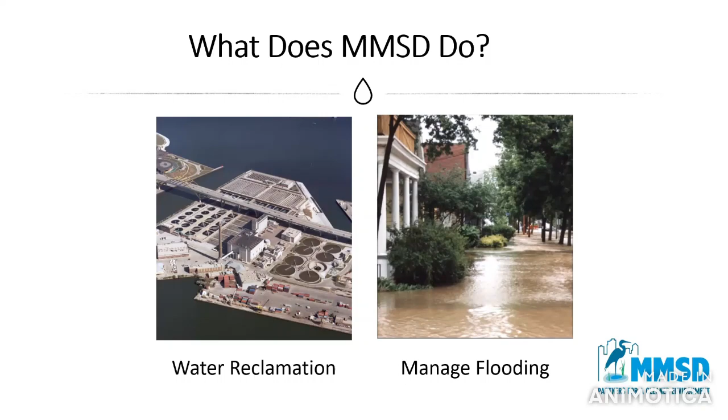Speaking of that and more, one of our greatest success and bragging points is our Milorganite program. Milorganite is a slow release nitrogen fertilizer. If you break down the name, it stands for Milwaukee Organic Nitrogen. It's a Class A biosolid. So what that means is through our Clean Water Act, CFR 40 Part 503, which is the provision for biosolids, we meet a Class A standard, which means it's safe for use in growing produce with the product.

It's a heat dried product that we produce at our Jones Island Water Reclamation Facility, which I'll give you more of an overview of. We produce and sell 50,000 US tons, or 45,000 metric tons annually, and it contributes to helping us offset about $12 million of operational costs on an annual basis.

On the green infrastructure side, I wanted to share this brand, Fresh Coast Guardians. It's our very public-facing, accessible brand for our green infrastructure initiatives and some of our other sustainability initiatives. It's a wonderful group of folks at MMSD housed in our current planning, research, and sustainability division under our sustainability manager, Brianne Pleer. The goal of our Fresh Coast Guardians is to capture 2.8 million cubic meters of water where it falls by 2035 in any rain events, which is equivalent to the first half inch, or over a centimeter, of rainfall on the service area.

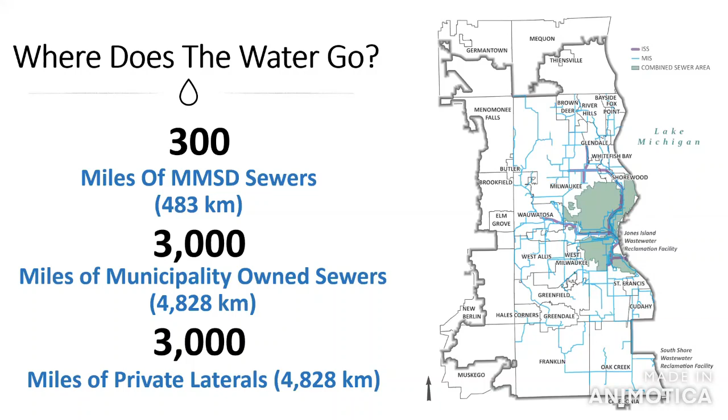On the map, the area in green is the part of our service area that is a combined sewer service area. The white around it is the separated sewer service area, and you'll see some of that conveyance network, the MIS, as well as our inline storage system in the dark purple, which is locally known as the Deep Tunnel, which has been online since 1994. And we'll talk a little bit more about that on the next slide.

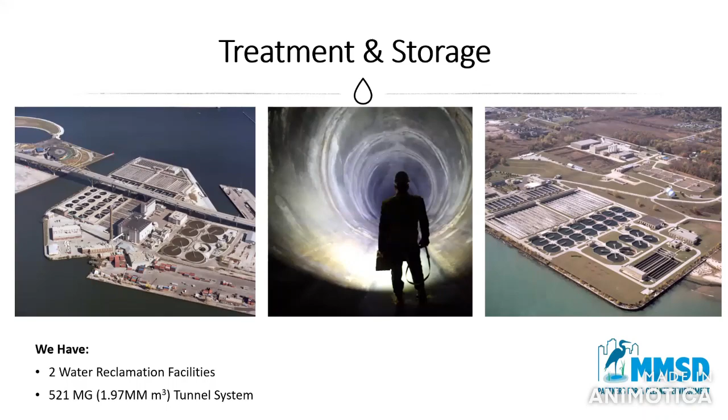And the picture in the middle just represents that they are interconnected, although that is a picture of our inline storage system, which is 521 million gallons, or just shy of 2 million cubic meters of storage volume, which has drastically improved our performance as an organization since it went online in 1994, with tremendous benefits to regional water quality, public health, and safety.

So to get a little more familiar with Jones Island, I have a very simplified process flow diagram, just to give you a high level idea of everything that goes on. For scale, at peak day it's about a 1.2 to 1.3 million cubic meter per day facility. We have the capacity to do blending at this facility, where we would bypass secondary treatment with primary treated wastewater, blend that with fully treated wastewater, and then send it to disinfection where it's chlorinated and dechlorinated and discharged within our permit. But it's an emergency measure to help mitigate overflows or basement backups.

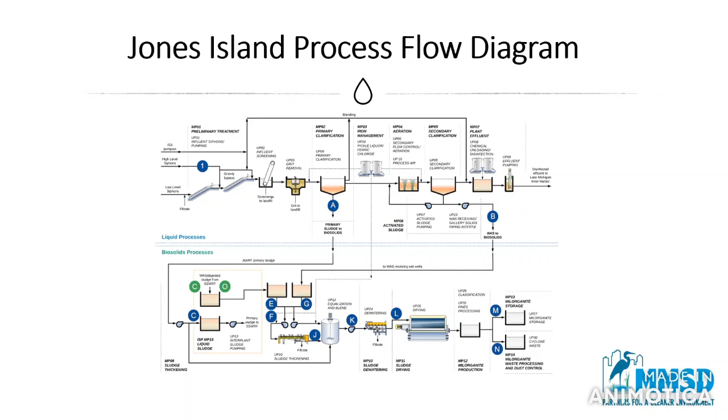South Shore is slightly smaller, a 1.1 million cubic meter per day facility, or 300 million gallons. Currently, we do not have any capacity to do blending here. As noted on the previous slide, the primary sludge comes here. This is our only site that does anaerobic digestion. And the biggest difference in the process flow, other than a much simpler start in terms of the flow control structure going into the screenings area of our preliminary treatment, is that in our primary treatment we use chemically enhanced primary treatment. So iron salts are used for removing phosphorus at this facility to meet our effluent discharge permit.

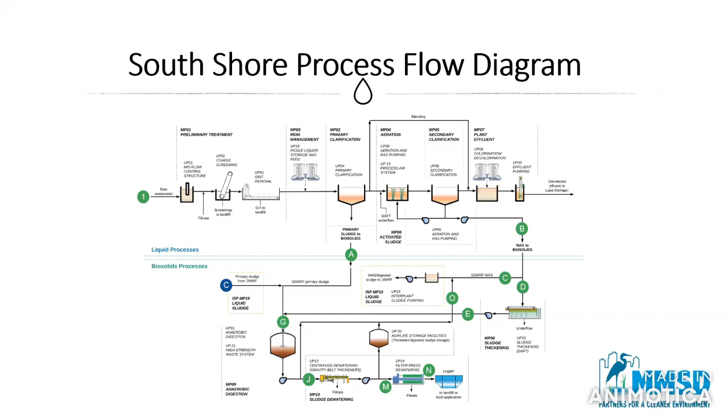The goal set by the EPA and the Clean Water Act is to treat 85% capture and clean. So we are well ahead of that, very proud of it. And that inline storage system has just done a tremendous job removing a lot of overflow and pollutants from our area waterways.

So a little more about MMSD is, I just wanted to share the mission of our organization. We protect the public health and environment through world-class, cost-effective water resource management, leadership, and partnership. We continue to expand our leadership role in developing regional approaches for protecting and improving water quality. We're continuing to develop and foster strategic alliances such as we have here today with the Water Council and Water Alliance to help us with our project planning and implementation.

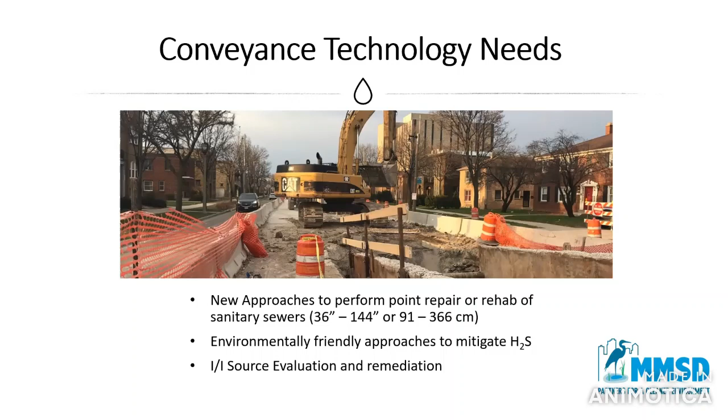On the treatment facility, bunch of things out there. Like everyone, we're trying to understand more about PFAS mitigation in liquids and biosolids. There are no current standards that we have to meet in this space, but we're trying to be proactive and learn what technologies are in place that might be able to help us achieve those goals that might come out in different regulatory guidance.

Also interested in sustainability of the facilities; greenhouse gas emission reduction and carbon neutrality are of high interest. So, ways to analyze in real time and note our emissions, and also be able to audit those and make decisions to help improve from an operational standpoint are of interest.

We also are interested, as we said earlier, in overflow reduction. So are there opportunities for high rate treatment for overflow reduction? This could actually fall on the other slide as well. We have some high volume overflow sites, and just curious if anybody is working on technologies that might help us continue to optimize how we operate and make decisions, and have some possible end of pipe technologies to help us

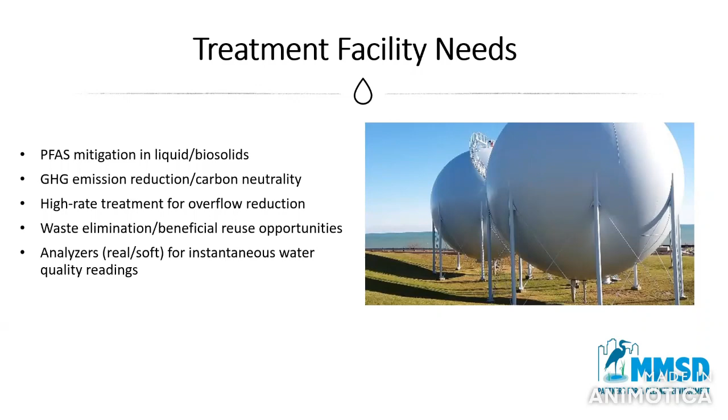So any ways to improve that gas handling system to maximize our combined heat and power, so gas quality improvement, whether that be a water wash system or something else, to help clean that gas, improve the quality of it to be used in our combined heat and power system for energy generation, to improve uptime, and also decrease the amount of costs associated with changing out carbon in our carbon scrubbers, if we can treat it a little bit before it hits those, and be a little more sustainable in the use of our carbon at MMSD.

Into stormwater management, looking for cost-effective active or passive control strategies to optimize storage and release of water based on forecasted conditions for the active controls, or observed conditions on site for passive controls. We're also very interested in remote inspection tools. We're staff resource limited, and as we get more and more green infrastructure implemented in the region, having low cost ways to inspect is very important to us.

So thinking of things like satellite spectral imaging to assess vegetation health, native versus non-native species for maintenance. Also, if there's any kind of clogging and ponding where there shouldn't be, we think there might be some opportunities there. So those with experience in this space, of course, we'd be interested in learning more and how that might help us make sure that our investments in stormwater management are long-term, meeting their design criteria.

Also interested in what are new best management practices to maximize infiltration of stormwater and mitigate pollution. So if there's better designs out there to help us target priority pollutants for us in our region, we have a total maximum daily load that includes TSS, phosphorus, and bacteria. So systems to help most effectively filter out those pollutants. Also interested in, are there new engineered soil mixes and media to help, again, improve water quality and water quantity benefits of green infrastructure.

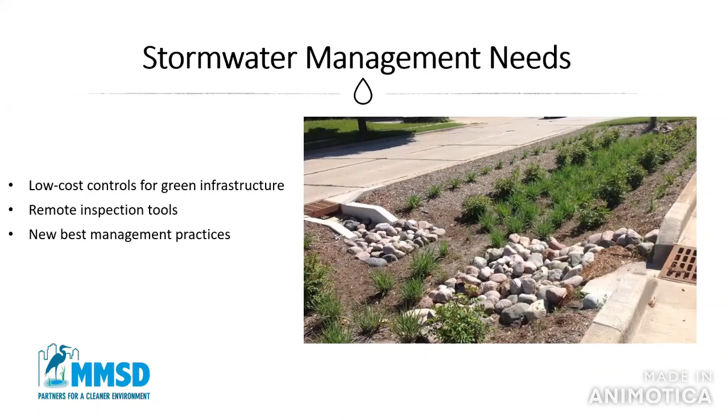Just wanted to now touch base briefly on our procurement opportunities at MMSD. We're pretty passionate about expanding our supplier diversity at MMSD, and I'll have some links for you to find things. But when you go to the MMSD landing page, there's in the upper ribbon a procurement section, which will really take you to all of our open procurement opportunities, but also the supplier diversity, business development, workforce development, and all these different resources that are available to you all to get plugged in with our procurement pipeline here at MMSD, get registered as a supplier of goods or services, and to be alerted to opportunities when there's opportunity to bid or propose on work with the district.

So within there's a bunch of other hyperlinks. So I provided a list of these, and these slides will be available to you all, but MMSD.com will take you to the landing page. You learn everything about MMSD. The Fresh Coast Guardian, so you can learn more about our sustainability program, our plans and vision there. Again, the procurement page, and then there's also the page that describes in more detail our 2035 vision.

The facilities plan link is the next hyperlink. That will get you into the technical detail as much as your heart desires about those processes that I described earlier. Then you can also see what we have planned for in our budget. So you can see the projects that are coming up, the timeline, where they're at, and you can use that to think about procurement opportunities you're interested in and monitor those opportunities as you get registered with us as a supplier or vendor.